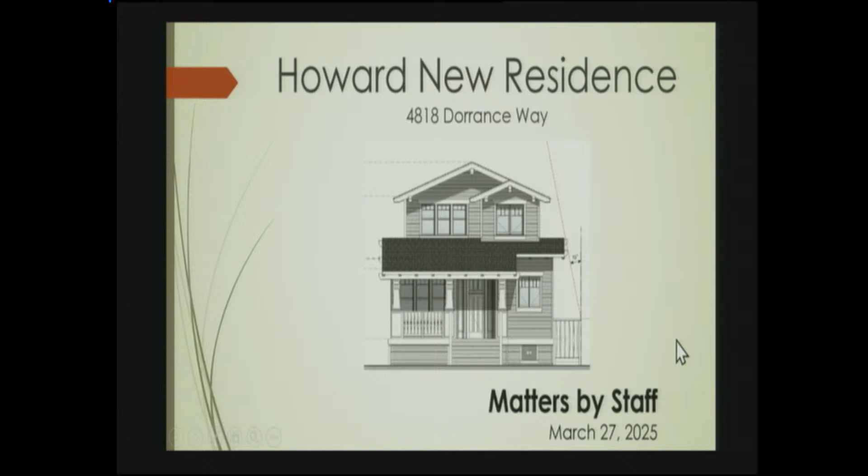All right, good evening, ARB members. I have a matters by staff item for you on the Howard New Residence on Dorrance, 4818 Dorrance. It's under construction right now if you've been by there recently. They want to make a few changes to the exterior and a little bit to the floor plan, so I'm going to go over those changes, and I just want your thoughts and if we can recommend approval for those. They will need a revised building permit for the scope of this work.

As you recall, well, it doesn't look like this anymore because they've started construction. Now it's got the foundation, but this is the vacant lot on Dorrance at 4818 Dorrance. The scope of the changes are: changing the exterior from brown shingle siding to gray lap siding, enclosing the master bedroom balcony and doing a little pop out on the second bedroom at the front, changing the porch landings and steps to wood instead of stone, dropping the floor in the mechanical room with a new exterior door that's at grade, eliminating an interior fireplace in the workshop, which is interior floor plan only, no exterior changes.

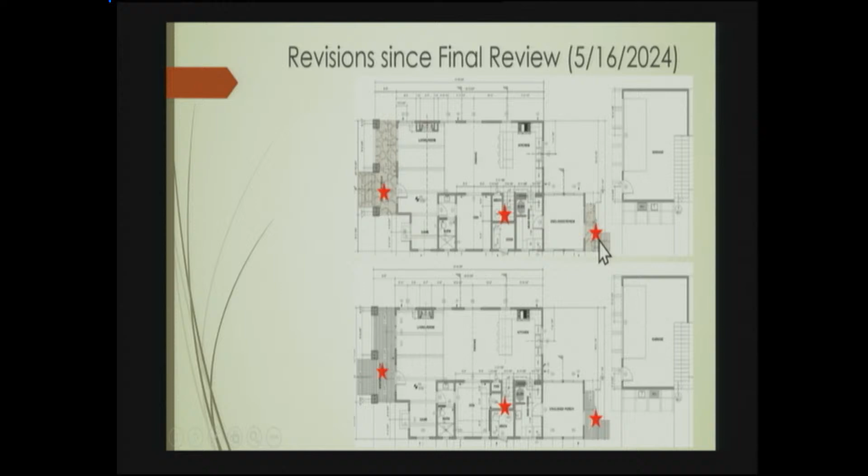There's no chimney or anything for the fireplace, and then just window changes throughout. So here's the changes to the floor plan. The old is on the top and the new is on the bottom. I put little stars where the changes are. You can see here the front porch was originally proposed to be stone, with stone steps, sandstone flagstone, and now they are proposing to have wood, a wooden porch with wood steps down. Here's that new mechanical room. It was originally supposed to be storage, with the mechanical accessible from the inside, and now they've decided it would be better to have the mechanical accessed from the outside in this bigger space, and then they've converted the other into a little closet for the den and a little pantry for the kitchen. And then these back steps here were originally stone and proposed to go to wood.

And then the second floor revisions. Originally, the master bedroom, or primary bedroom, had a balcony that looked over towards the street. To keep the relief for the front elevation, the second bedroom stepped out a little bit here. So the balcony was already sunk in, and then the bedroom stepped out. Now they are enclosing that bedroom, the balcony, would like to make it part of the bedroom and eliminate the balcony because of waterproofing concerns. Then to keep that same relief from the street elevation, they're popping that second bedroom out just a little bit more to keep that relief in the front elevation. I meant to draw this on here before the meeting today, but the balcony enclosure and the new bedroom pop out are not in the front yard setback. The front porch was down here, part of that is in the front yard, and a little front strip of the living area downstairs is in the front yard, but this additional square footage is not at all in the front yard setback.

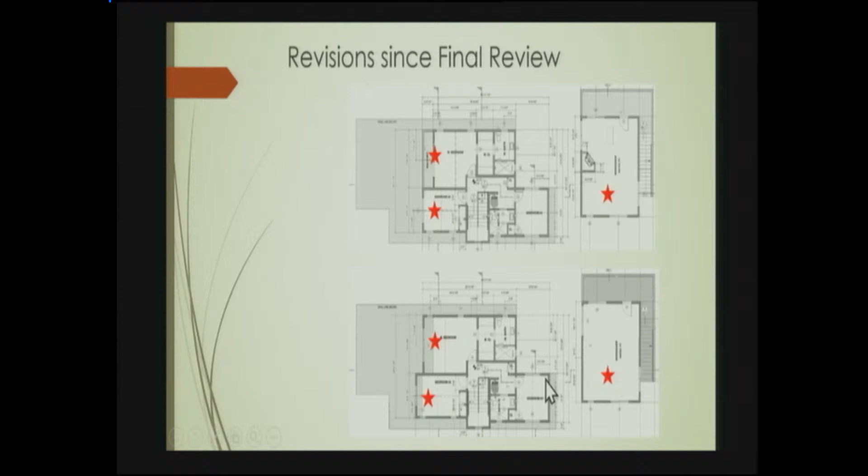And then here's the change in the workshop to just eliminate this little interior fireplace and just have a big open room floor plan. And then here's the elevations where you can see everything a little better.

So this is the front elevation of the street view. Here you can see the new wood steps, and then the change from having doors out to a balcony here. Now that wall is flush with this part. And then the second bedroom pops out just a little bit more, and there are now a little bit bigger windows there. And then 3 windows here now instead of the doors, and a little bit smaller window here in the front. All throughout the house, there are just little tweaks to the windows. And then that's it for the front elevation.

And the funny thing to me is originally they proposed the house to be gray, and now they're back to the gray. So it was a little bit darker gray. They were going to do the shake shingles in a little bit darker gray, but I just thought it was funny. It went full circle.

And then here, I believe this is a second bedroom window that's getting eliminated, or it was going to be in a closet or something. Anyway, so now there's just 3 windows along this side, and there were 4 on the second floor. And then these windows here, this is the living room and den area entry. They have a little bit higher sills, and these 2 are a little closer together than originally.

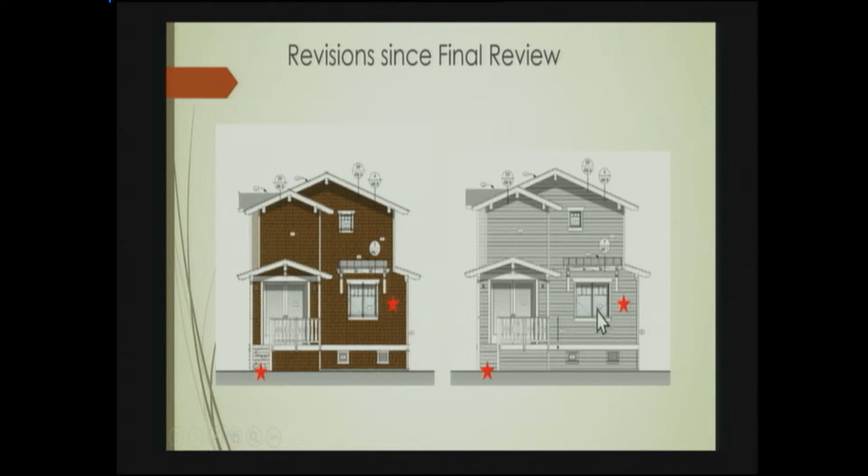And this is the rear elevation. Again, stone here is now proposed to be the wood. And then just a little bit narrower, a little bit wider window here for the kitchen now, and it was proposed originally a little bit narrower. And then here's the updated colors and materials showing the new lighter gray lap siding.

Oops. And that concludes my presentation for the matters by staff.

So I'll go back to that front. You guys did not - actually, those came in this afternoon after I already printed those packets for you. So, but Cindy, the roof's the same, the comp shingles. Yeah.

Cindy, could we go back to that material screen, since we don't have it here? So basically, everything's the same as it was before, except the siding was a shingle, dark brown shingle, and then they had a wood stain color that they were going to use that they've eliminated. Now they're just going to go with the white trim on everything.

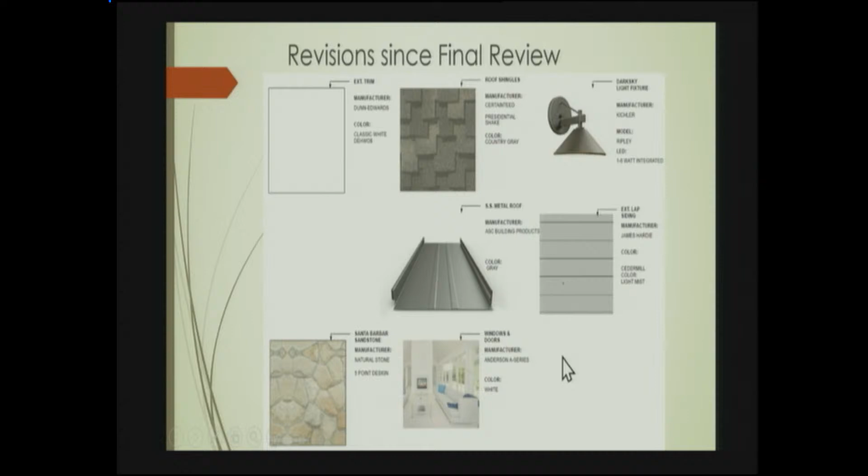Cindy, could you go to the east elevation? What is that horizontal? Hardie panels, a Hardie board. Yeah. So I just can't read it, sorry. Oh yeah, no, that's Hardie. It holds up really well in the beach neighborhood.

Is that just like a backsplash up there? Right, so for fireproofing or heat, so that it doesn't make marks on the wall if they burn anything.

Any other questions? When they added the square footage, did that change the FARs? It did a little bit, but it didn't impact the project because it's PRD 20 zone, which goes by lot coverage, and it didn't change the square footage of the first floor, so they're fine. Thank you.

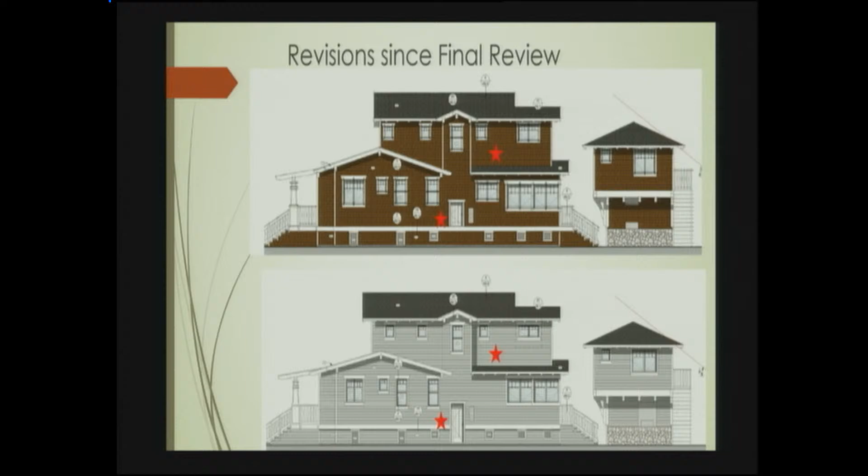And we don't address the permitting matters, but they'll have to revise the building permit, with substantial conformance with the previous planning approval if the ARB's comfortable with the changes. There are little structural alterations because some of the windows are changing, so the headers and that sort of thing will be changing. So that's going to trigger the building permit, plus the new square footage, moving those walls around, shear walls, all that fun stuff. But we didn't want them to submit for the building permit revision until we knew you guys were going to be okay with the changes.

So I'll go back to that front page and we'll just do a little punch list down the things that are changing, if that's okay for discussion. Of course. Okay, and it's a matters by staff, so you're not voting. So how does everybody feel about changing the siding from the brown shingle to gray lap?

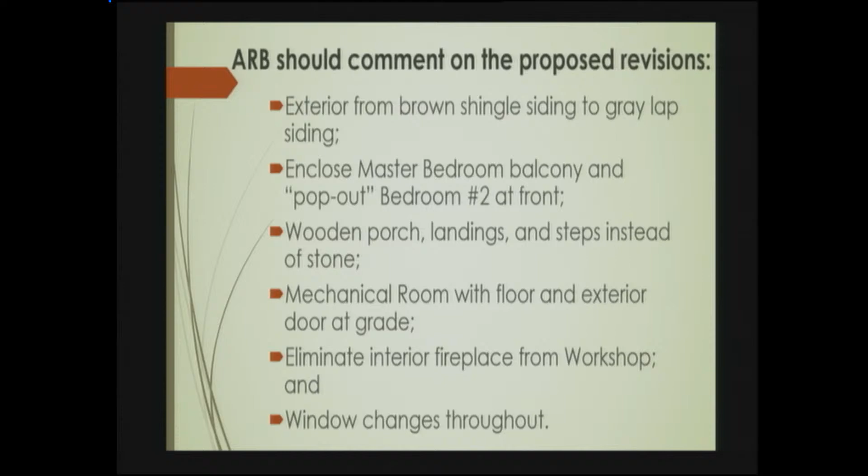One point, should we go, any public comment before this? Oh, yes, sorry. Anybody, Brian, if anybody here from the public would like to comment? Nobody on Zoom? Correct, nobody over Zoom. Oh, is Dylan Chappelle on by Zoom? Nobody's actually currently on.

Okay, sorry, Cindy, go ahead.

So I guess we could do it the opposite way. Does any board member have any concern with any of the proposed changes that they'd like to opine upon?

Go ahead. I believe I need to recuse myself from this discussion because it's my neighbor. Oh, good point, she might be close enough on this one. We didn't think about it because it was handled by staff. We looked at the other items on the agenda. Good point, let's see if we can see.

So any of the other three, are there any concerns with any of the proposed changes, or any discussion of those?

I don't have any concerns with it, it's fine. No, I think it's disappointing that we're losing the second floor balcony and the stone at the entry, but I don't have any problem with the changes.

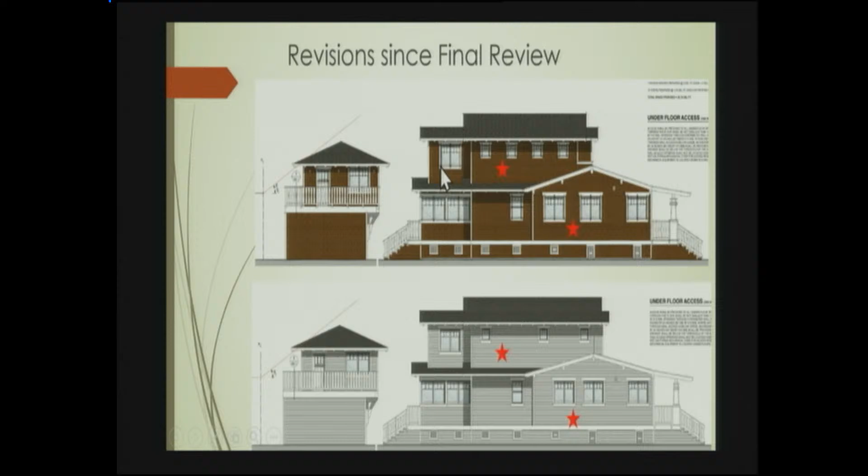Yeah, I'm good with it. I think actually the front elevation looks better, that bedroom coming out on the roof line, breaking up the roof line, is pretty nice.

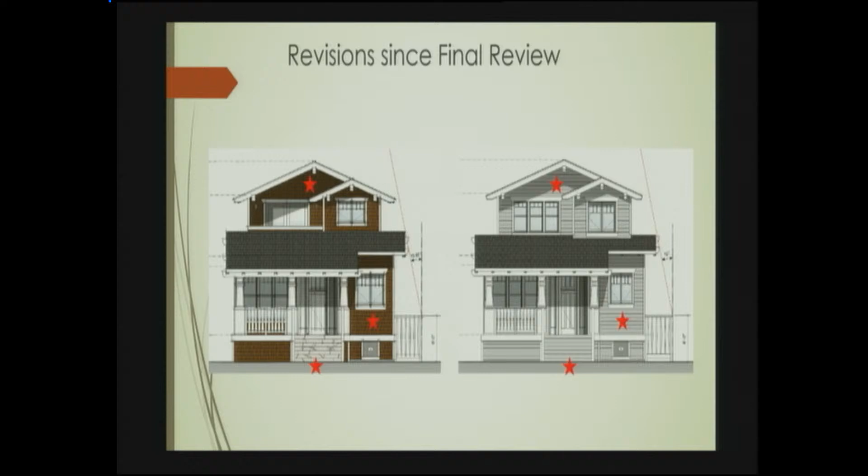All right, so they are okay to proceed with the building permit. Thank you, okay acting chair, you may move on to item number one.

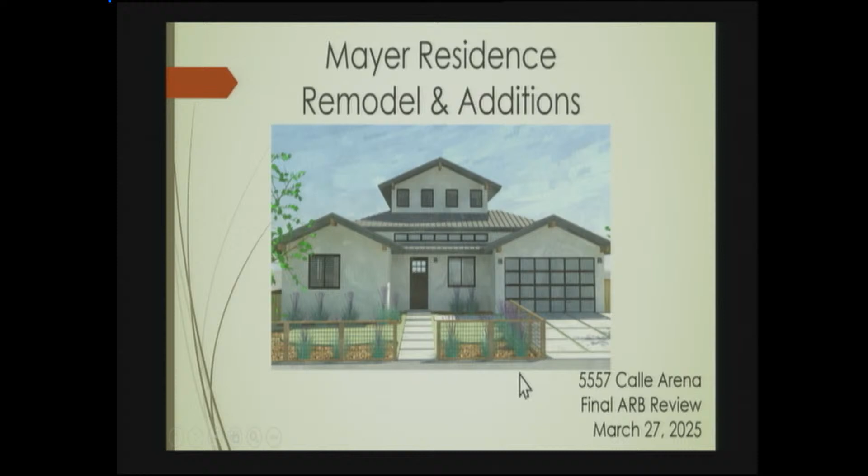The project is at 33.67% of its lot coverage and 39.9% of the FAR because of the second story. A 242 square foot covered patio is included at the rear of the dwelling. The project would upgrade the garage from a 1-car to a 2-car garage. The maximum height would be 23 feet 8 inches above finished grade. New walls and fencing, hardscape, and landscaping are proposed. And the Planning Commission approved the conditional use permit for this project on August 5th, 2024, so it's been blessed by the Planning Commission.

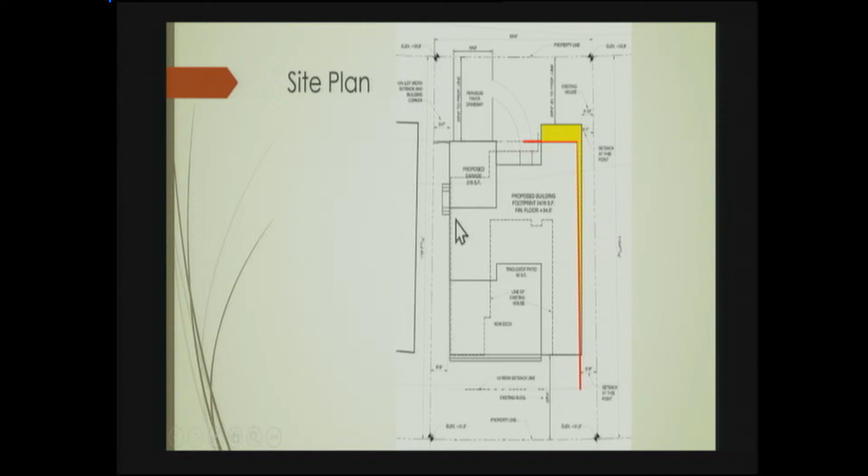So here's the site plan. As you might recall, the reason they needed the conditional use permit was for this corner of the house that's partially in the front yard setback and also in the side yard setback currently required. The rest of the project is back here. And then here's the floor plan—no real changes on the floor plan, just little tweaks to the windows on the elevation since the last time you saw it, but no major changes.

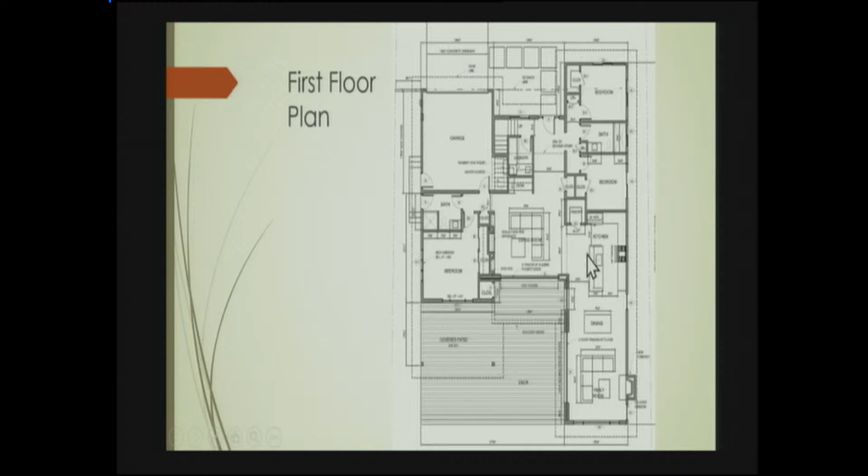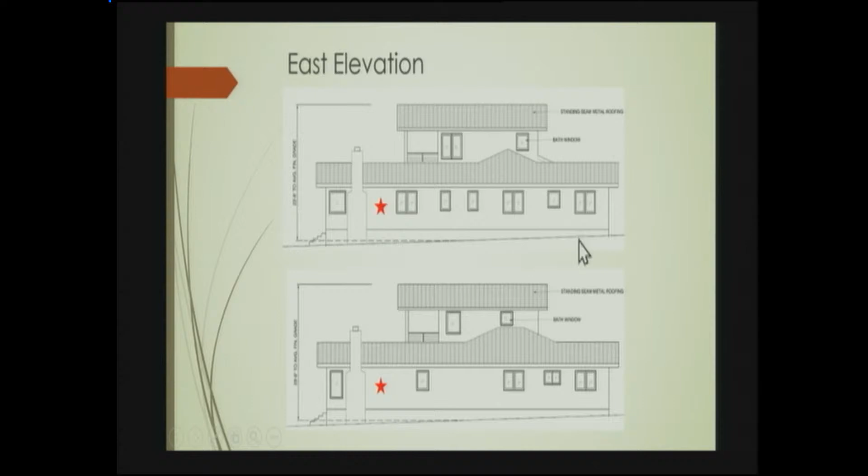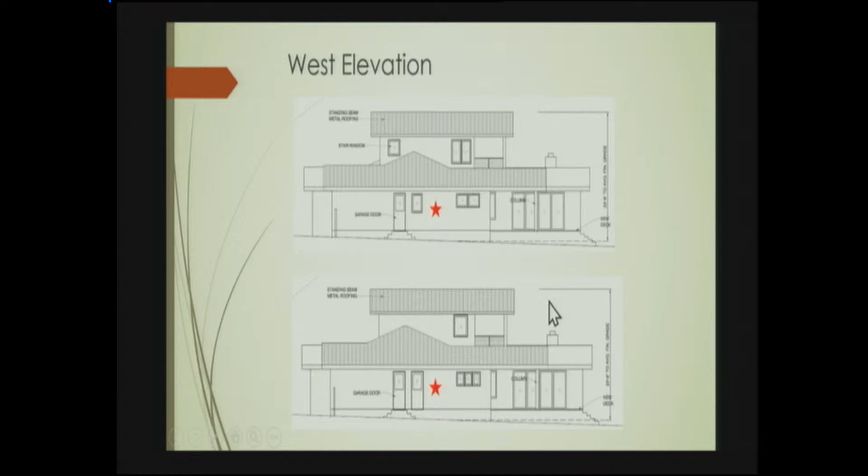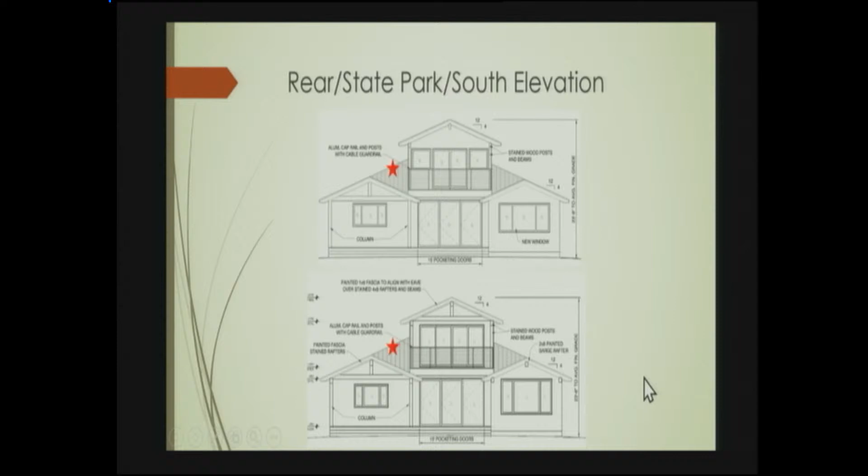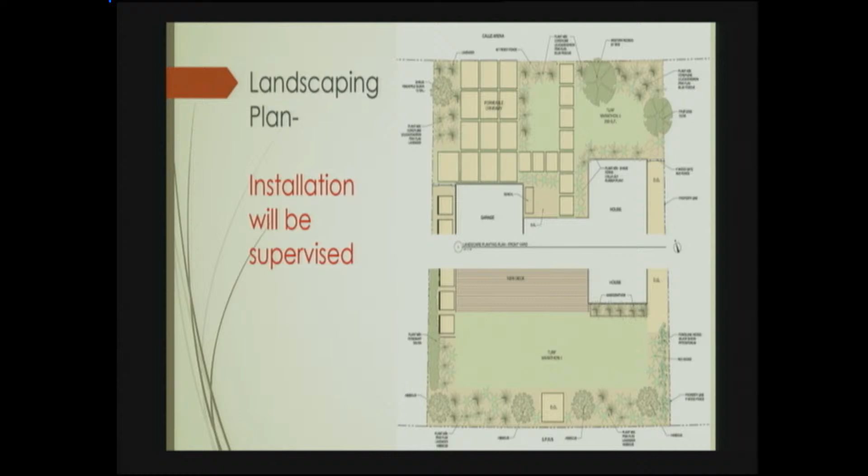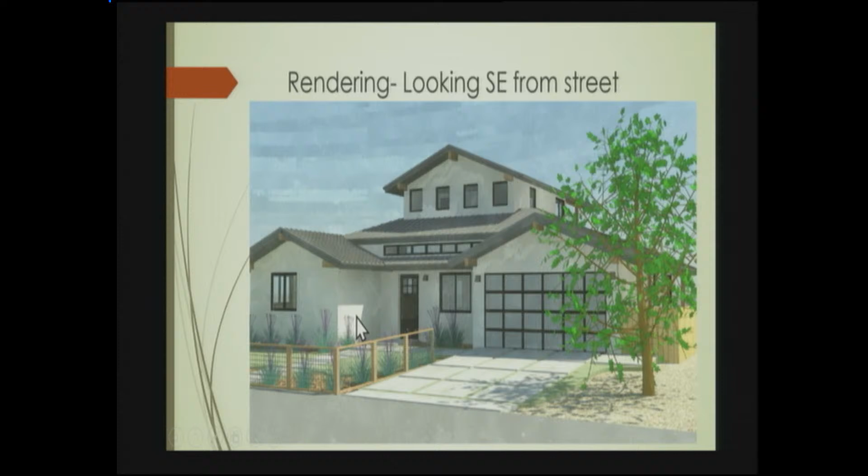And then the colors and materials—last time, this is the Swiss coffee, and the color chip we saw last time looked faded out, more like pure white than Swiss coffee. So we've included a better chip of Swiss coffee to portray the darker cream color, since your comment last time was to have a darker body color. So the Swiss coffee is darker than bright white. Here are the renderings, portraying the exterior in the Swiss coffee color, which is a little darker than the color chip you saw last time.

So the summary issues tonight are the architectural style and details—the details are in your plan sets—the proposed colors and materials, including the exterior lighting, and the overall neighborhood compatibility. I'll just leave it at the color, because this is really the main thing tonight: confirming that the Swiss coffee is a dark enough color for the body.

Any questions for staff?

Cindy, just a quick question—the height is 23.8. Do you recall what the next door neighbor's height is, just offhand? Is it similar in height? I want to say 21.8 or something like that, but this one has an existing raised foundation. So the height of the actual structure is about 1.5 feet less than the 23.8, but the height down to finished grade makes it a bigger number, taller, because of the raised floor.

Anything, Lisa? I have one—just to confirm the power lines will be buried to the property? From the street to the project, any lines serving the project, yes. In the immediate vicinity, not the whole street. There's a power pole on the corner, the west corner—is that on your lot or the neighbor's lot? It's on both. There's a standard that runs down on the other side of that fence. So for this project, they would be required to bring the lines underground from that pole and into the house.

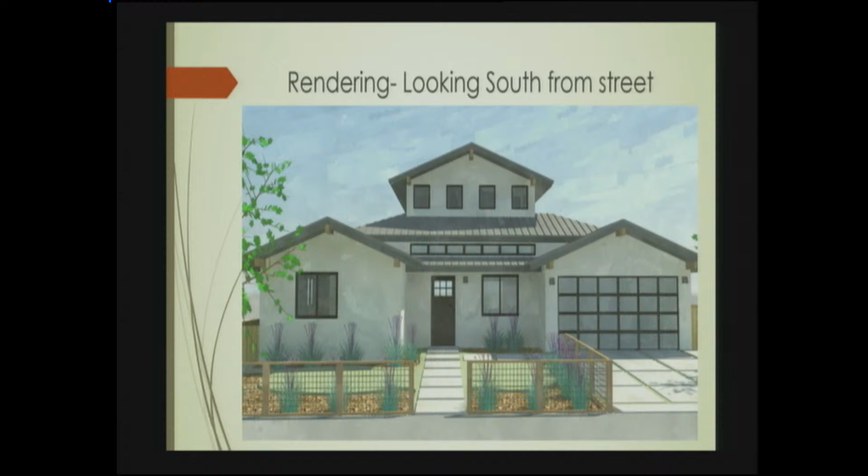The overhang of the roof above that row of windows is a 6-inch eave jutting out just over the windows, and just below it is a false eave, 3 feet deep, that provides shelter to the porch below. Do you feel that 6 inches is enough to protect those windows? The vertical distance between the two roof planes is only 18 inches, so if we come out with a 2-foot overhang, it's going to be very dark downstairs looking up at that overhang. I'm just wondering if it's really going to protect the windows enough. Some people have no overhang, so I think the 6 inches will do something, but there's a bit of a mountain view through those windows as you come to the front door, so we're thinking about that.

Board Member Cook, if you look at sheet A3.1, there's a great detail of how that clerestory is going to work, in the upper left-hand corner. Board Member Wolf, sorry, close, I got the double O in there. Thanks.

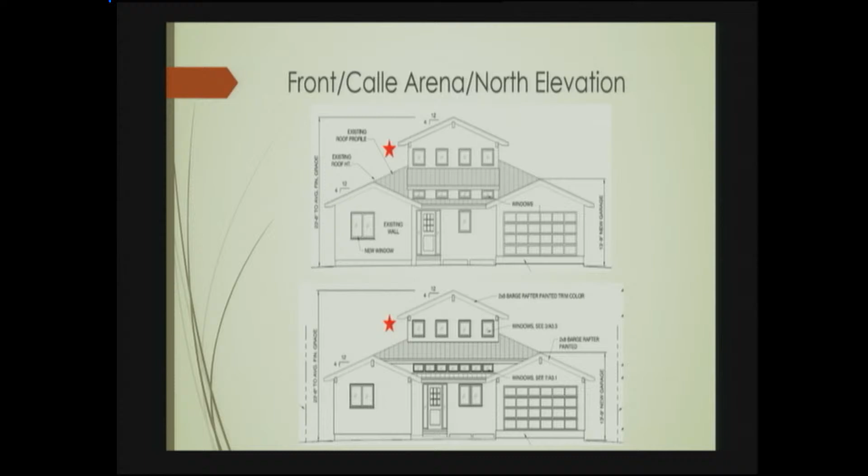Why would you have an 8x10 beam below those windows when it's not really spanning anything on that detail, if I'm reading the detail right? On detail 6, sheet A3.1. Just a question. I actually don't know, that's a very good question. It says 6 by 10, actually I think it's a 6, not an 8. Well, it doesn't need to be there, I can't explain that one, but it does show a note: fixed windows with 3x6 posts. You might want to flush frame each above the little windows and be done with it. It does say 6 by 10, so you're going to be having some revisions there.

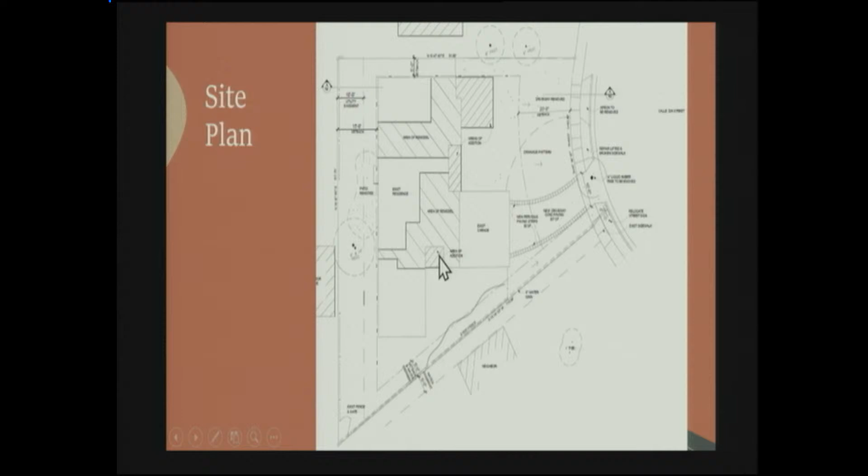And in this corner of the house on the north side, a little tiny corner of the roof does get into the solar access plane. But the director was not overly concerned about that because it's just a single story structure. But you guys are welcome to comment on that if you think it's going to be an issue, causing shade on the neighbor to the north's property.

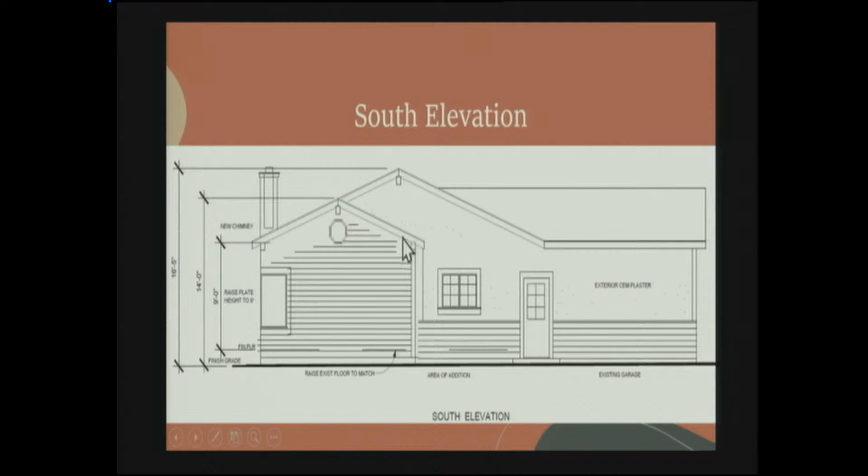And this is the north elevation. Again, here's that little corner of the roof where it infringes into the solar access plane. And then here's the addition, 14-foot high roof over the bedroom addition, just so you guys know, to keep it a little low from the street.

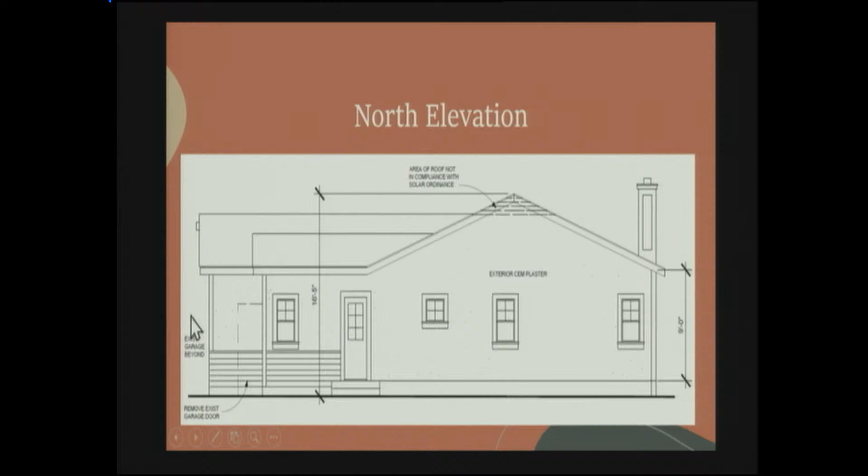And then here is the old outline of where the garage door used to be, which is now going to be over on the other side, and where that used to be is getting filled in.

And then here's the east-west section through the bedroom and the new addition. So this would be the new primary bedroom here, and then the bathroom, and then the new bedroom addition with the California roof over to connect it on. And new footings here.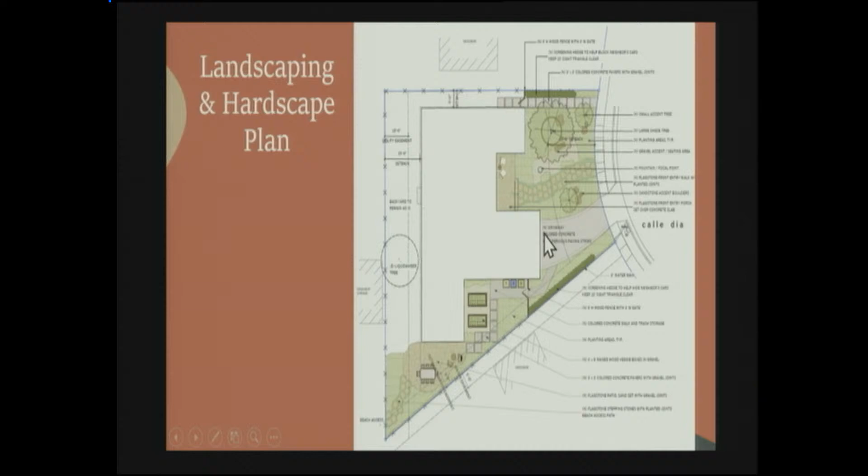And then the proposed colors and materials - again, we have that same color swatch problem. Oh, and she brought better ones. So Jill's got some to share when it's her turn, so good. If you look up the colors online, they're actually more sagey and not as clean a yellow - those are the actual colors. And then with the brown roof.

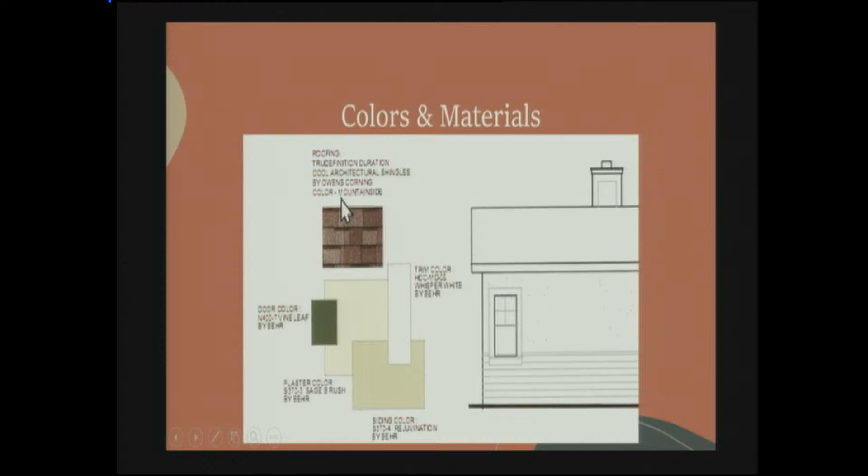So the summary issues for comments tonight would be the proposed architectural style and details, the proposed colors and materials, the fencing height and locations - back to that little 6-foot fence that hides the trash cans - and then the proposed landscaping and hardscaping plan. And that concludes my presentation.

Very good, thank you, Cindy. Any questions for staff?

Cindy, could you go back to the one slide that had the solar issue? If the increase in the height was not there, that would not be an issue, is that correct? Correct.

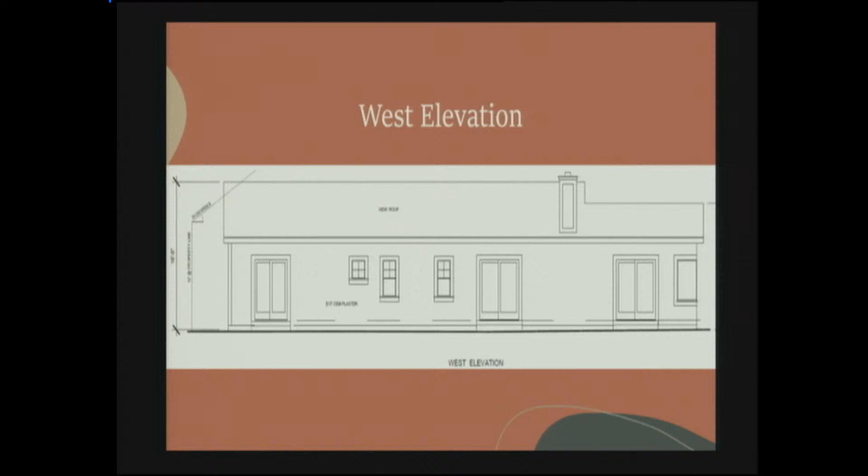Any other questions for staff? Board Member Wolf? Nope.

I have one question. The calculation of the lot coverage - does it include the utility setbacks and the water setbacks here in the rear and the side? No - oh, excuse me, the lot coverage, they are included in the area of the lot. So it is in the calculation? Yes, it is accounted for. I assumed it was, it's not excluded. Okay, thank you.

With that, I'd like to invite any presentation you'd like to make. Yeah, and then scooch it up a little bit.

My name is Jill Ratkovich. I'm the architect. I have my clients, the D'Amatos, with me. They bought this property 20 years ago with the intention of retiring here, becoming community members and living here for the rest of their lives, leaving it to their children.

Basically, it's sort of a beauty makeover. It's got a variety of styles, multiple plate heights, roof slopes, floor elevations, and exterior finishes. So we're trying to give it a sense of style rather than going for the craftsman beach cottage look - something a little more timeless than the tract look they have right now. It does look like a dated 50s style house, which to some people might be charming, but to most people just looks dated.

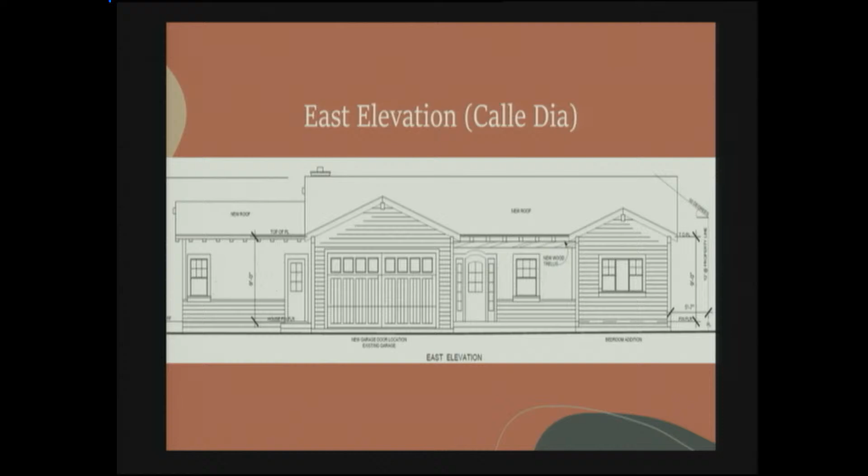Thank you, any other questions? Board Member Little? Yes, in looking at A2, are all of the rooms going to have sloped ceilings? No, the dining and living are pretty much identified. The new bedroom, the dining, and the living room will have the volume, the sloped vaulted ceilings. The others will be flat ceilings, which is another reason for the 9-foot plate, just because the rooms are bigger than they were - it's going to feel more enclosed with an 8-foot ceiling. We'd like to get a little more space and volume without going to every room with a vaulted ceiling, so it's the living room and the dining room and the new bedroom.

I think the new floor plan bedroom shows the rooms that do slope. Right, I see that. But the kitchen will be a flat ceiling then? Kitchen will be flat, and the other bedroom will be flat? Yes. Okay.

I have an issue with kitchens and volumes anyway, because you don't know where to end your cabinets, and it ends up being dead space up above and a dust collector. But I feel like 8 foot is really low in a sense, and that way you could do soffits above the cabinets and still have a sense of height in there.

Good, Richard? Yeah, that's it. Board Member Wolf? I think it looks like a nice design.

I have one little thing I always wonder about. Now that you've got the beautiful entryway, with a little step and porch going up to the front entryway, does that second window to the right, if some little neighbor is coming around and looking in, is it looking directly into a bathroom? Well, the window's looking into a doorway. If that door is open, you're going to see a sink in there.

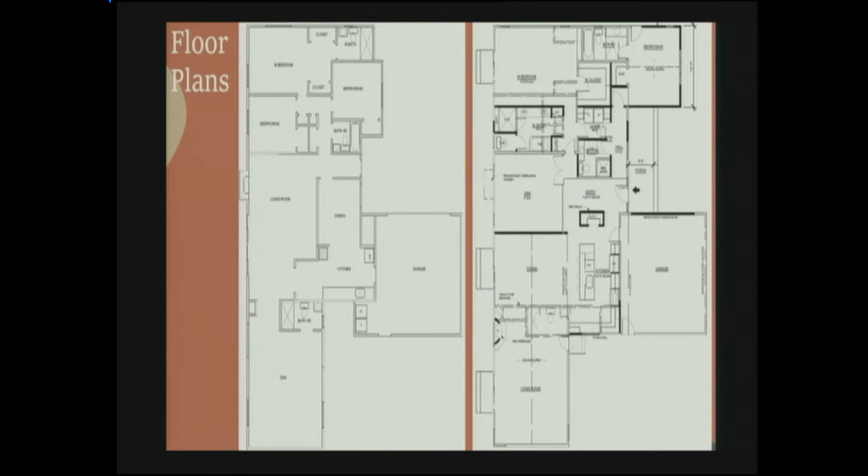Hopefully you don't have neighbors peering into your windows. They're not my neighbors, but a neighbor or solicitor could come in and do that. That's my only thing with the design, otherwise I think it's a nice design. Sometimes neighbors and people are a little nosy, and if they want to look at the sink, or whoever's stepping out of the shower, you'd consider altering the door just a tiny bit one way or the other.

Well, it is the guest bath, not even really a guest bath since each bedroom has its own bathroom, so it's really a leftover bathroom that will be used. The toilet and sink will be used, but not so much the shower probably. Or maybe consider just frosting that window. Anyway, it's good design, thanks.

Thank you. Very good. I just have one thought, a bit of a broken record, over on A4. As the driveway comes in where that tree is being removed, does that pole get removed also?

No, the street sign is being removed, the power pole stays. And is the power coming from that pole to your house? Yes, and I would imagine it will be undergrounded. I'm sure they're going to require that because of the size of this remodel. It would be wonderful if that pole went down, for everyone.

It's going to be tight on the driveway there, I think, isn't it? A little bit. The curb cut's typically 10 feet. And if transportation has an issue, I think we have some flexibility. It looks like it's in a water easement. Anyway, that's all I had.

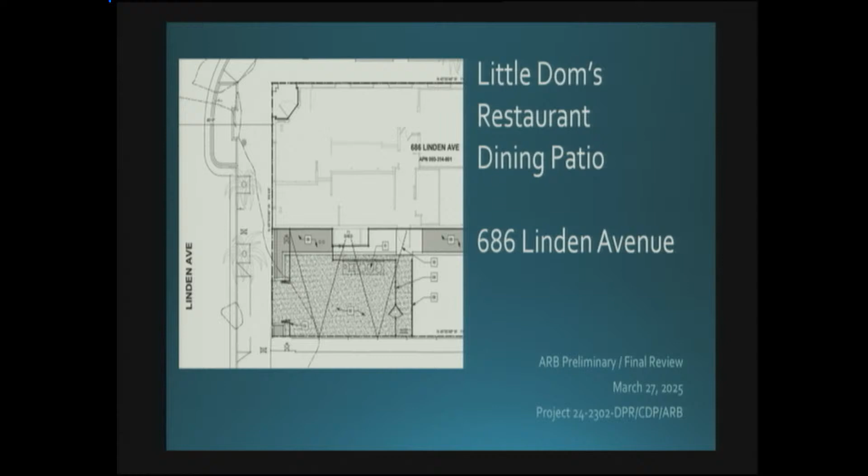The patio area is approximately 830 square feet in size. It would be located at the southern side of the existing restaurant building, which now functions as a drive aisle. It would consist of an at-grade chip seal surface, basically taking the existing AC pavement area and beautifying it to represent the new dining patio area.

Would include a string of hooded lights over the proposed new dining patio area. As currently designed, it would include 6-foot fencing and bifold gates along the Linden frontage. That fencing would function to secure the dining patio after business hours, and also to create in the leftover drive aisle and previous parking area essentially a storage area for restaurant use.

Also included along the northern section of the property, along the 7th Street frontage, would be 6-foot vehicular entry gates to just close that off. That would no longer function as that L-shaped, pull-through drive aisle and parking. So it would make sense to close that off, and also to secure the storage area.

And some very minor planting changes. The existing planters would remain and just be refurbished with some new plant species within the existing planters.

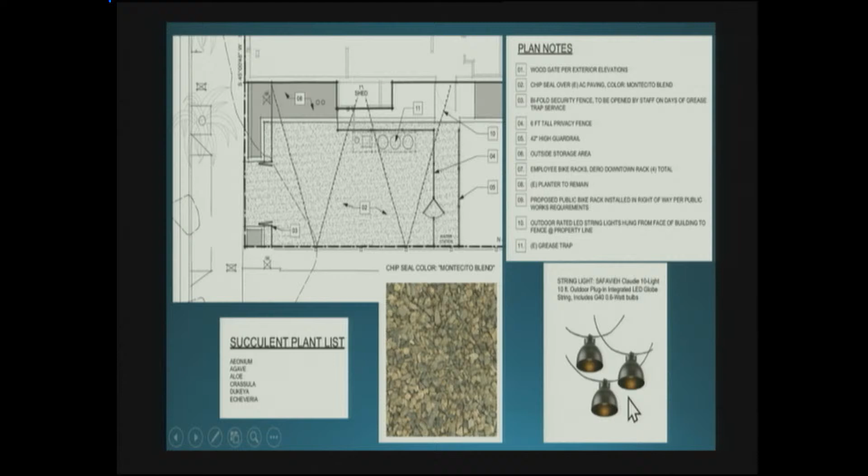In terms of materials, very straightforward. There's a Montecito blend, or a kind of earth tone chip seal color, that would replace the existing asphalt surface there. We do have to keep this area open. Originally the project was proposed with a raised wood deck, but we ran into issues with the sanitary district, so it was revised to keep it as an at-grade surface. Here you can see the proposed hooded string lights, which, much like the 700 Linden project, we're requesting for dark sky compliance and neighborhood compatibility. These would meet all the city's requirements.

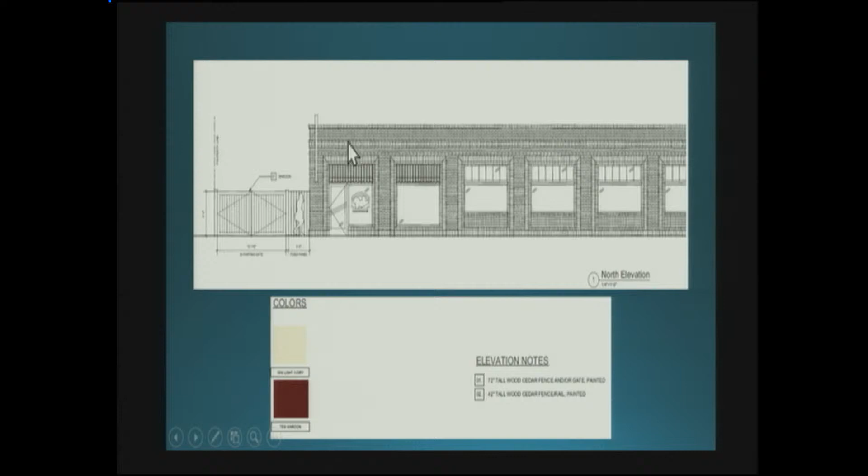Here's our elevation along 7th Street. You can see the existing building, and the new 6-foot vehicular gates at that rear drive aisle, painted in a maroon color to match that portion of the building. On the Linden frontage side, same design, 6-foot bifold gates, also in a maroon color.

As discussed in the staff report, the director and I sat down and looked at this, and we're concerned with some of the policies relating to neighborhood compatibility, the downtown core, and pedestrian friendly nature. What we're hoping the applicant could consider is, instead of 6-foot fences, especially on the Linden frontage, is reducing that to a lower fence in that location, much like other businesses downtown, that would still secure the area and prevent trespass, with the 6-foot fence behind it. So essentially swap what's designed now, where the 42-inch fence is behind the 6-foot fence, and swap those, much like other dining patios downtown, to clearly segregate public versus private areas.

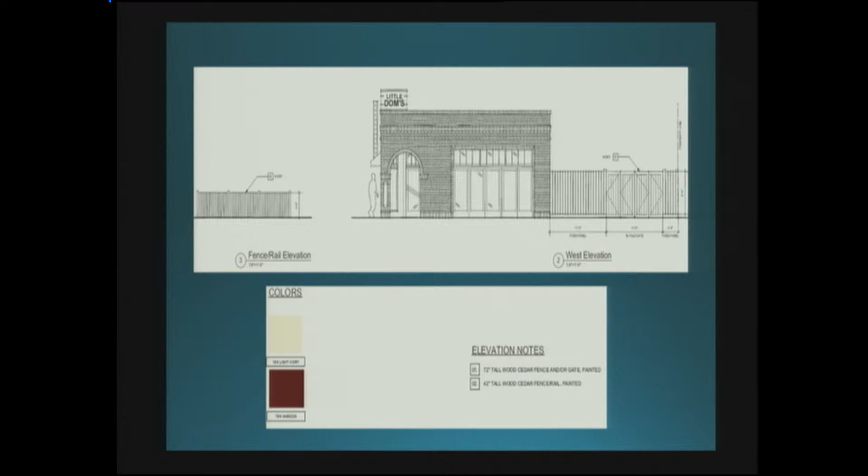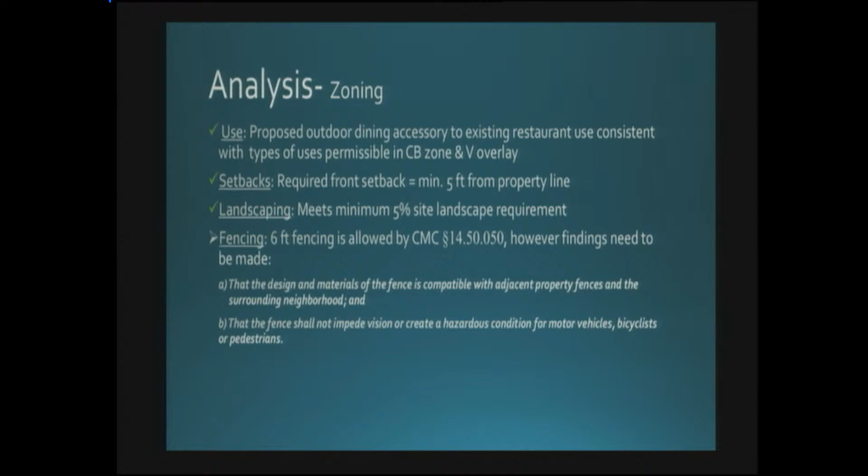In terms of compatibility, we surveyed around the neighborhood, and there really aren't 6-foot fences for businesses, especially down on Linden. So that was a concern of the director, to comply with our neighborhood compatibility policies as expressed in the staff report. That's essentially what staff is asking for today — your deliberation on the fencing. We're completely in support of the project, the dining patio concept, and the use of AB 2097; all of those things are fine. But there is concern about making the finding in the municipal code that the design and materials of the fence are compatible with adjacent property fences in the surrounding neighborhood. So that's essentially what we're here for.

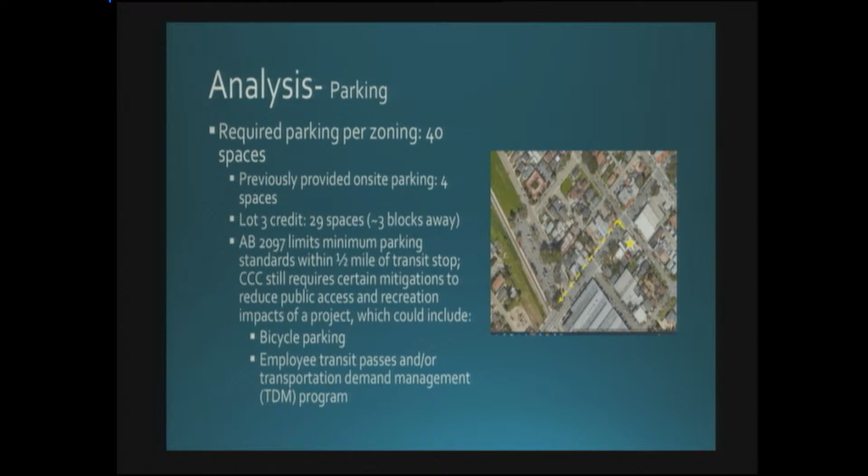As discussed, the parking as currently proposed would require 40 parking spaces. 29 spaces are already provided by a credit in Lot 3, that historic credit that had been paid into. As a result of the project, we're losing 4 spaces which were previously not really used but were allocated or previously approved for the project, and increasing by 7 to make up for the new patio area. But again, the applicant has the ability to use AB 2097 to remove those parking spaces.

In summary, we'd like your feedback here; it's on for preliminary and final. It's a very straightforward project, so we don't want to make this overly complicated, but we did want your feedback on the layout, colors, materials, lighting, and landscape design, the fencing design and arrangement, and the overall compatibility. That's it for me.

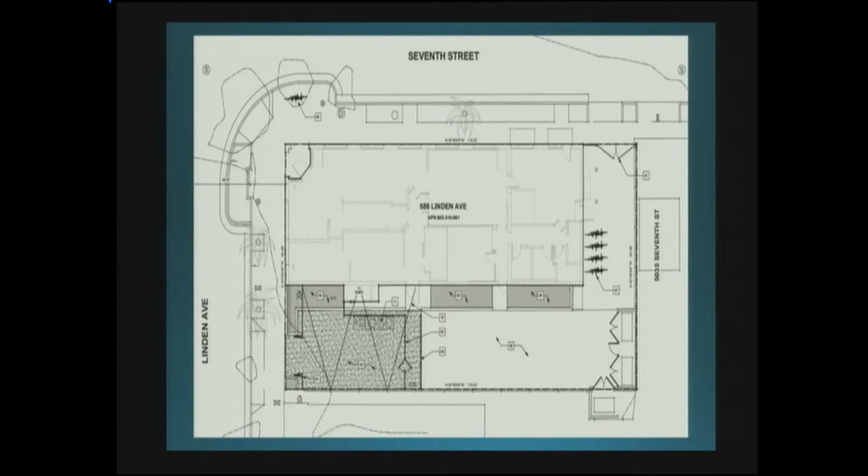Oh, by the way, sorry, I should have said ex parte up front. I did go to the property and I spoke to the neighboring business who's here today, and I did speak to your general manager, correct. So I did walk through the property.

We don't want customers to see the shed that has the water heater, the chemical closet, and the mat cleaning. So that's the right side of the shed—that's all fenced off by design. And then I think you had another question when you asked my manager—egress to the patio is just from the street, you don't go through the restaurant. Yeah, and that's what I assumed, and the pathway there between the taller fence and the shorter fence, that's service.

Other question we breezed by - the lighting overhead, how high is that, and how do you get the poles onto the neighboring property? You'll have to deal with that, the fence is pretty low. That fence is 6 feet high. I was just going to put posts up, maybe 9 feet, and bring it back to the building.

There's actually already power there in that left corner, switched and everything. It's part of the exterior lighting on the building. There's another one near the grease area too, up top on the corner. Oh, there's that one up high - yeah, that's for all the outdoor lighting, switched and on a timer already. Very good.